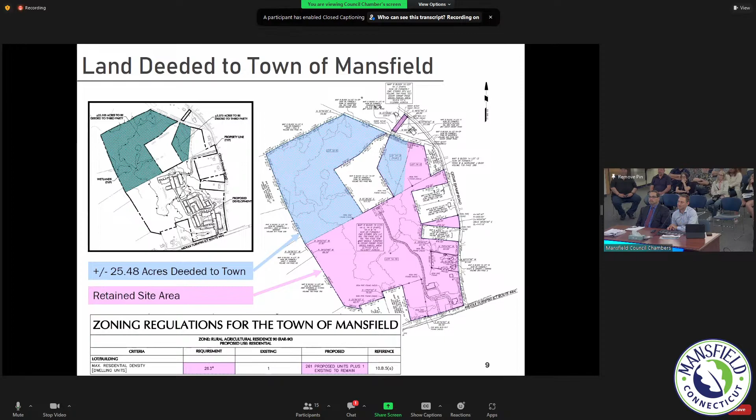This is our proposed site plan, so we can break it down into a front, middle, and back section. We have 262 dwellings, 261 proposed new apartments, and then we also have 17 Cedar Swamp Road, which is a single-family home. We were constrained by wetlands and tried to only build on the previously disturbed golf course, really important to us. So we've come to this layout, reworked many times over the years, and we have a mix. We have 3 different building types: apartment-style buildings, mansion-style buildings, and townhomes. I'll get into detail later, but the idea is that we can appeal to a wide demographic. We have a lot of different unit types, and we want to focus on whoever wants to live in Mansfield. We also have 52 affordable and workforce housing units.

In the front portion, you can also see we have resident amenity space here, with 2 patios, grills, lounge seating, and other outdoor amenities and games. In the back portion, we have another patio and green space, and we're preserving this pond and improving it, as I'll show on the landscape plan. We have green space here with a walking path, and we also have a fenced dog run.

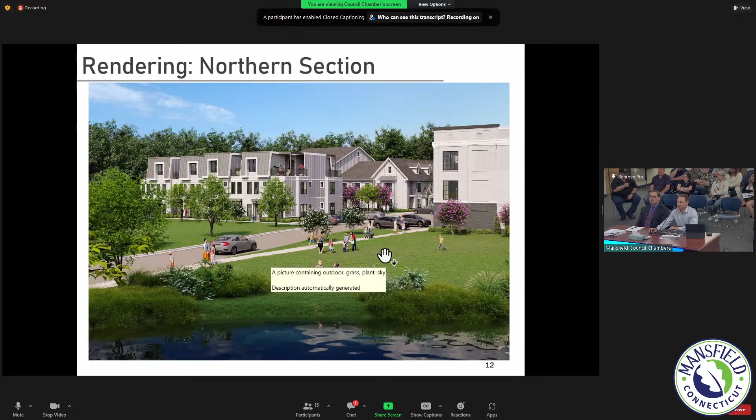This is a rendering showing the front portion, the outdoor amenity space with the 2 patios with grills and seating. It looks a lot smaller on a 2D plan, so we wanted to be able to show this in 3D.

This is a mansion-style apartment unit. Essentially, it's supposed to look like one single-family home, but it has 17 different units.

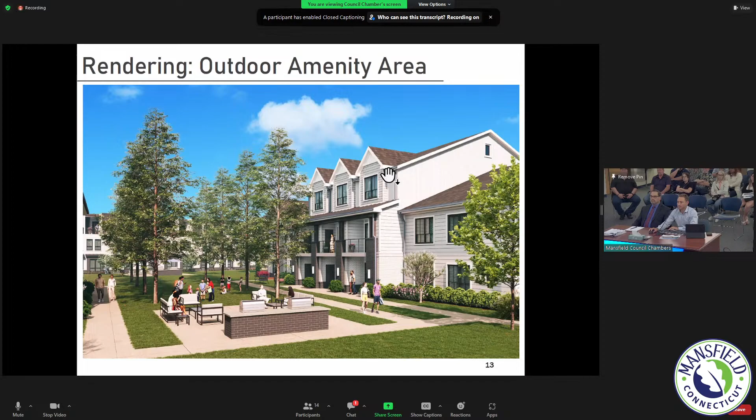Tim, are you there? Yeah, great. Thanks, Jacob. And for the record, my name is Tim O'Neill with Langan Engineering. I'm a licensed professional in the state of Connecticut. Just before we jump into the site civil discussion about stormwater and site layout, I'd like to remind everyone that this project has gone through the inland wetland approval process, and we've received approval from the committee and the third-party peer reviewer through that process.

What we're seeing here is a map of the existing watersheds on the site as it exists today. You'll see that there are 4 main watersheds, A, B, C, and D. All of these watersheds eventually make their way down to the large western wetland area at the bottom of the slope to the left of the screen here.

You'll also notice there's a subwatershed A3 that actually collects runoff from Cedar Swamp Road. It's collected into catch basins and conveyed via below-ground pipe network through our private development and discharged into an on-site wetland located in subwatershed A1.

It's also important to note that the existing site does not have any existing stormwater infrastructure, with the exception of a few pipe runs that we just discussed in watershed A1 and A2, and the existence of a man-made irrigation pond located in subwatershed C1-A. That irrigation pond was never intended for stormwater attenuation or improvement; it was strictly placed for irrigation, and it's in a bit of a decayed state.

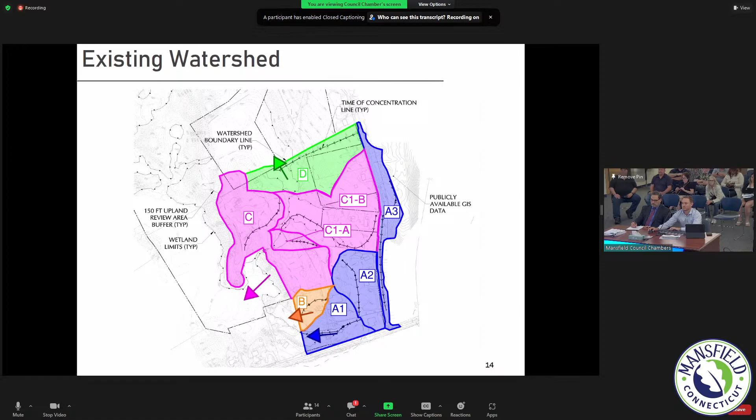Here we're seeing a zoom out again of the entire 64-acre parcel. We've highlighted the extensive wetland systems located on the property. We have roughly 22 acres of wetland on the overall 64-acre parcel. The yellow areas identify the 150-foot upland review area associated with each of the wetlands.

You'll notice that our proposed development is screened in black, in the bottom right-hand 15 acres of the site, majority proposed on previously disturbed land. You'll also notice that our concentration of development is located outside of those 150-foot buffer regions where practical, and we have very minimal direct impacts to the wetlands.

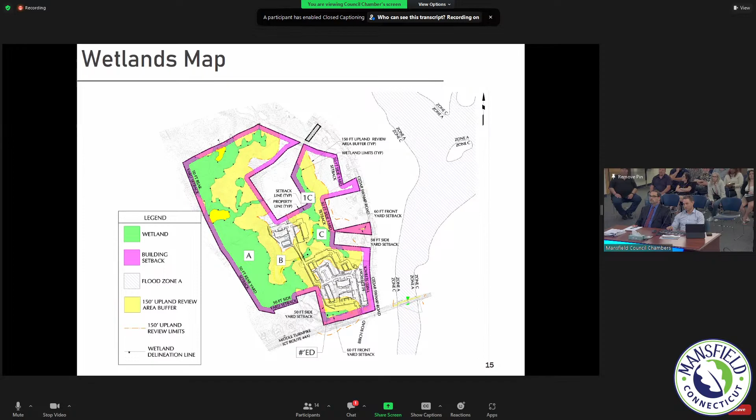In fact, our only direct impact is at the outlet of that man-made pond that we discussed on the last slide. That pond outlet control structure isn't functioning well, and it's releasing water at uncontrolled rates, and there's been known to have some issues with stable water elevations in there. Our proposed project will rebuild that outlet control structure, contribute more water to it, and help develop a healthier ecosystem and habitat surrounding that wetland in the proposed condition.

Here you can see our proposed watershed design. You can see that we are maintaining those 4 major watersheds and discharging to the same point discharge throughout the site. Again, all watersheds make their way back down to that lower western wetland region. The proposed stormwater management system provides very high levels of attenuation, infiltration for groundwater recharge, and stormwater quality.

There are 2 points on the attenuation that I would like to make quickly. The town regulation states that the 2-year rain event in the proposed condition should produce flow rates that are 50% of the existing 2-year event flow rates, or be reduced to match the 1-year existing flow rates. There's a stipulation in the regulation that allows the commission to deem this criteria impractical under certain situations, and we have identified 2 watersheds here that we believe fit that criteria.

The first would be watershed D, located at the northern region of the plan here. Watershed D is being reduced by approximately 10% in the proposed condition. The reason we aren't providing the 50% reduction is that it would require the installation of additional attenuation features or stormwater management features that would push out our limit of disturbance and further impact the well-established wooded area abutting it, or even create additional direct wetland impacts.

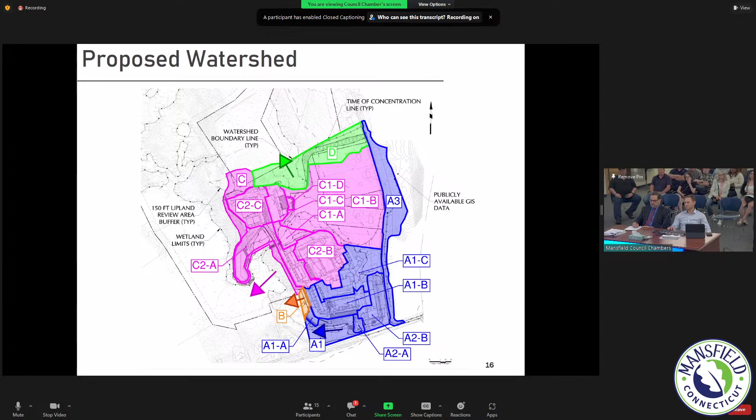However, we are still proposing to reduce the flows in watershed A by around 30%. So again, we are asking the committee to identify these as impractical for those two watersheds only, and the rest of the application meets the criteria set forth in the base regulations for the proposed design.

And then moving into the stormwater management system. This stormwater management system achieves a very high level of performance, and in many cases, we're actually exceeding the town and state requirements under many of the criteria.

We have high level of protection to the wetlands. We are, again, working in very close proximity to some of these wetlands, and we have designed our site to be condensed and as far away from these regions as we can, but we wanted to ensure that we are providing very high levels of water quality treatment, attenuation, infiltration, groundwater recharge, and water cooling effects and benefits to the environment around it. There are several features installed throughout the site, and many of the watersheds run through multiple treatment features before they actually make their way and discharge into the wetland features themselves.

We also have velocity dissipating features at the outlets of all of these discharge locations, which means that we're not creating point discharges that will scour and create sediment transport into these wetland environments to potentially harm them. So our robust stormwater management system here has really been designed to provide an extremely high level of protection to the surrounding sensitive areas before water is discharging from the site.

And it is certainly a step up from the previous condition where we had no stormwater management or attenuation or water quality features included. There's also one more point on this one.

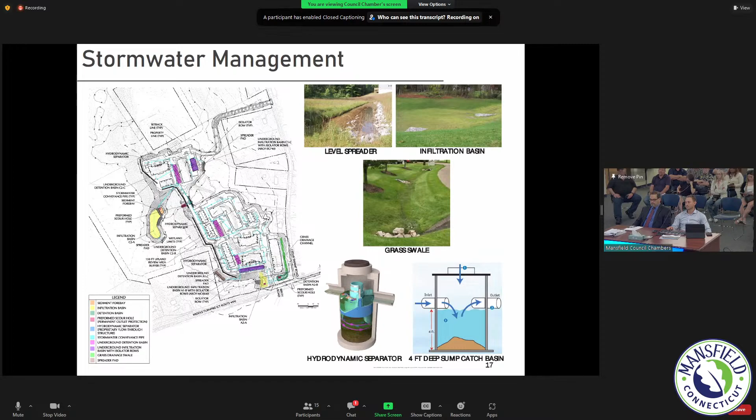There are two access points to the site. The main would be a split driveway connection down to Middle Turnpike. This is where all of the daily activity at the site will be taking place, which will keep traffic on the main road and out of the smaller local collector roads through neighborhoods such as Cedar Swamp Road.

The second would be the maintenance and emergency access gravel access road that goes up to the north and connects over to Cedar Swamp Road just off the page. This access road, again, is reserved only for maintenance and emergency vehicles. There are actually two swing locked gates at either end of the gravel driveway to ensure that no unauthorized access is being used on that roadway in that location.

You can see the vehicular and pedestrian routing throughout the site here to provide access to each of the buildings. The pedestrian connections are providing access from each building to the amenity space, the trash and maintenance enclosures, as well as a pedestrian connection down along Middle Turnpike.

There is a proposed pedestrian crossing that will connect to the multi-use trail on the south side of Middle Turnpike. We'll have more on that a little bit later, but that connection will also provide access to a public transit stop that is located several hundred feet to the south along Birch Road.

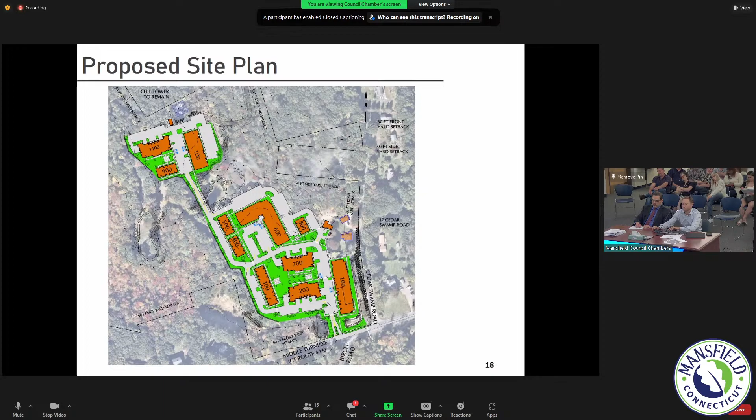Another thing you'll see here is the existing wooded scenario and setbacks from our direct abutters along Cedar Swamp Road. These wooded areas to remain will provide a significant visual buffer from each of those properties. Another aspect to this specific site is the topography — we know there's a pretty significant grade change going from east to west, which actually helps provide additional screening for our abutting neighbors.

So site section view A is a cross section cut from the west to the east through the northern section. We're showing the 53 Cedar Swamp Road residential unit right up to the public right of way. As you move down the hill, you can see several hundred feet of existing, well-established wooded area between the abutter and the proposed development, located around station 550.

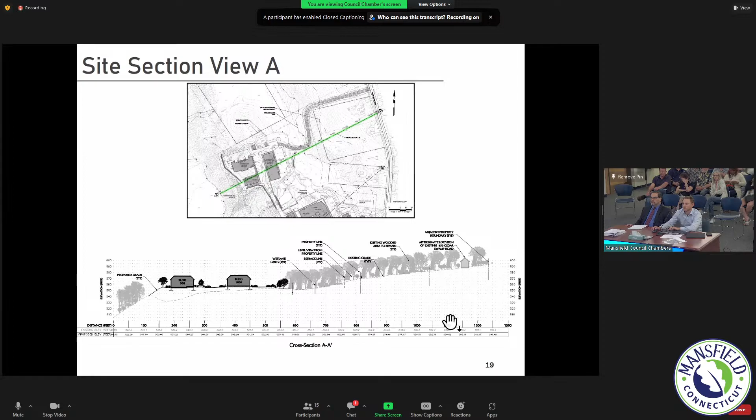In addition to the existing wooded buffer, we have proposed landscaping, which we'll get into, and the elevation difference. You can see that the residential abutter is actually above the proposed roof line of the buildings in the northern portion. So someone standing in their windows, even without any of the existing trees immediately on their property, is going to have very good screening from the proposed property below.

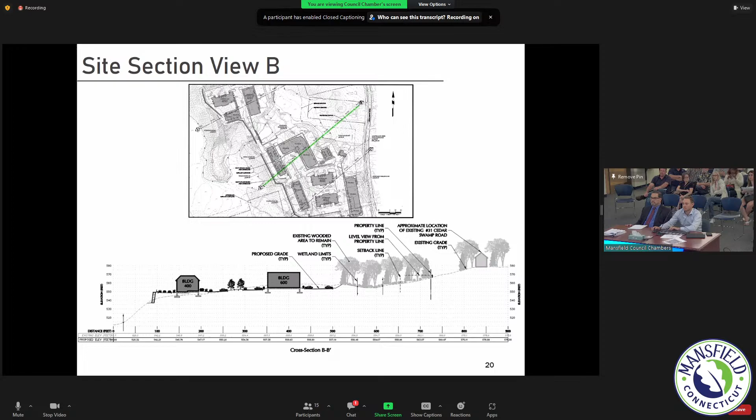Moving on to section B, which shows our cross section to our next closest abutter on Cedar Swamp Road — again we have a lot of the same similar scenarios, with existing wooded areas to remain providing visual screening, and the elevated existing residential home above the proposed property, located at a lower elevation several hundred feet to the west.

We'll move into a bit of a discussion on utilities. We have been in contact with all service providers, and we have confirmed that service will be available to the site.

For the sewer capacity, there's an existing town-owned sewer network located at the intersection of Middle Turnpike and Cedar Swamp Road that our proposed development will be tying a gravity line into.

The western two-thirds of the property discharges by gravity to an on-site private lift station. From that lift station, effluent is pumped to the east and discharged again to an on-site private gravity system where it will continue to the south and east and join into the public town system and continue on its way from there.

The water service will be provided by CT Water. This will require a roughly 750 linear foot water main extension for a 12-inch water main that's located just to the east of the property past the Cedar Swamp Brook and Middle Turnpike crossing. We have confirmed with the CT Water company that they do have capacity, and they have deemed that the extension to the property for service is appropriate for this application.

We have also been in contact with Connecticut Natural Gas to provide gas to the site. This is currently an ongoing conversation, but preliminary designs are in the works to extend service to the site and provide distribution on the private property itself.

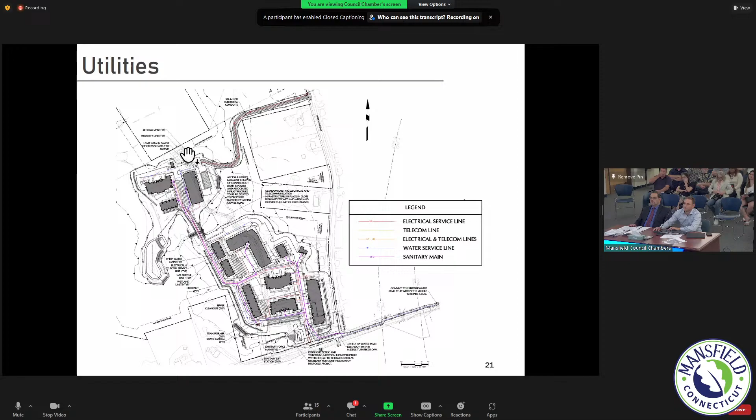If you could swap to the next page. With the cell phone tower to remain, we will need to relocate the current below-grade infrastructure and the easements granted to utility companies. We'll be demolishing and relocating the easement and below-grade infrastructure from the highlighted existing yellow easements that go down and tie into the network along Middle Turnpike to the magenta area.

The infrastructure will all be completely below ground and below the 20-foot wide maintenance and emergency access easement up to Cedar Swamp Road, where we will tie into the utilities along that right of way there.

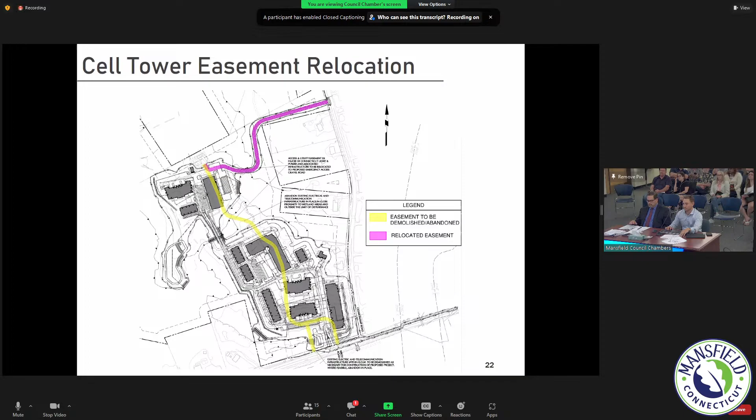Before we move into the next section—yep, next slide here. I'd just like to reiterate that the soil erosion and sediment control plans were reviewed under the inland wetland application and peer review process that we currently have approvals for.

We chose to go with a 3-phased soil erosion and sediment control plan, understanding that we have a lot of sensitive wetlands on site. We wanted to be positive that we were providing a robust and comprehensive soil erosion and sediment control plan throughout construction to ensure that these sensitive areas are not impacted.

In phase one, the contractor will come in and install all of the perimeter controls, and you can see that there are more robust controls in close proximity to wetland areas. These would consist of compost filter tube berms and silt fences rather than just your standard silt fence, shown in blue. We have a few discrete areas where we are also adding in hay bales for a more structural barrier where steep slopes exist.

We have sediment traps and basins to divert runoff to for settlement time before eventually discharging to the wetlands themselves. In phase one, you could expect work such as clearing, grubbing, and construction staging, but before any work is performed, these perimeter controls and sediment erosion control features will be installed.

You'll also see that there's a phase 1A insert, and that is because the underground infrastructure for the cell phone tower needs to be installed immediately so that we can get the disconnect and reconnection with low service interruptions and to progress the design of that early on in construction.

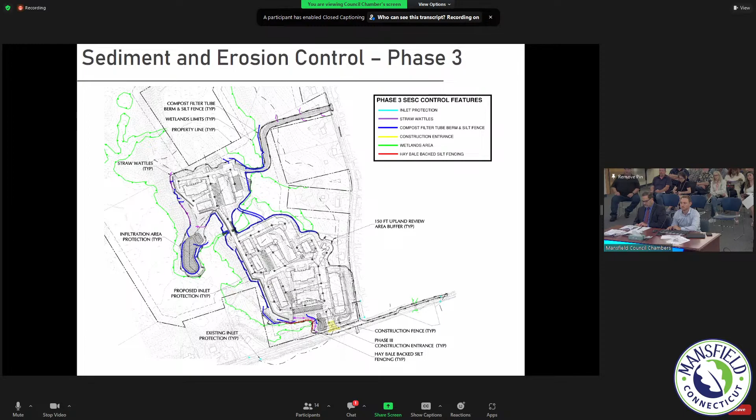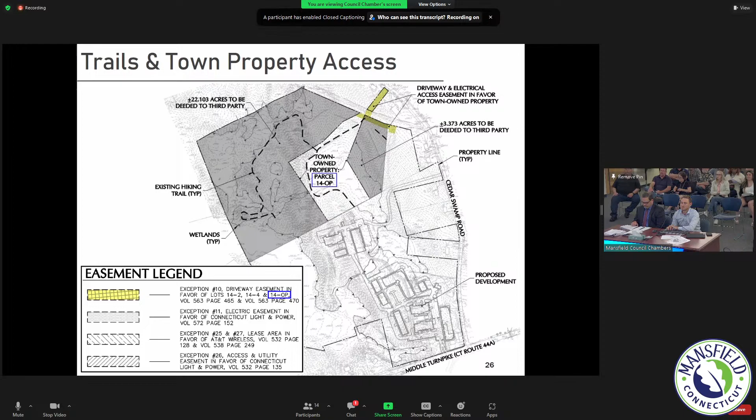Before I turn it over, I'd like to give a quick comparison to where our original application to the inland wetlands back in 2021 started, and where we've ended up with the application before you today.

Our most notable features are the significantly increased buffer areas between sensitive areas such as wetlands and our neighboring property lines. You'll also see a significant reduction in proposed retaining wall height throughout the entire western face of the proposed development, the most significant one being a reduction from approximately a 40-foot retaining wall down to a 20-foot retaining wall, to work with the topography of the existing site and respond to comments we've received from the town.

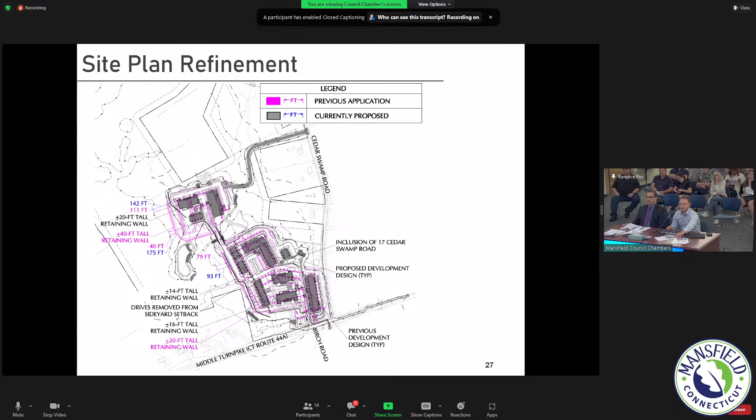And with that, I'll turn it back over to Jacob. All right, funner stuff.

The goal here is to create a community. You may ask why we have three separate building types. One, it's from feedback over the last five years on what the town would like to see, which is more middle density housing. Second, by using cohesive elements, designs, pictures, and windows, we were able to create a community within a community.

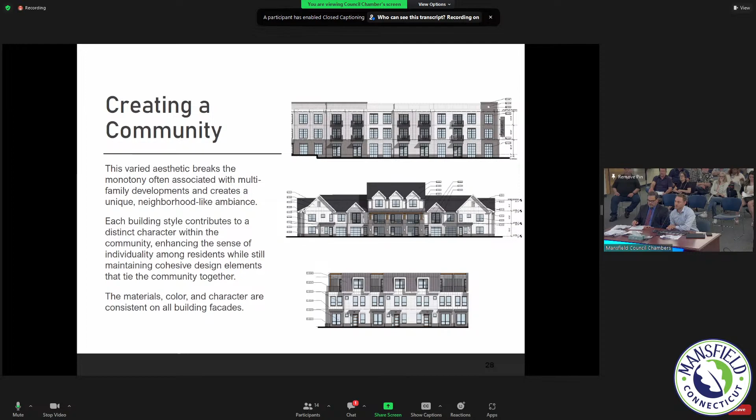A lot of multifamily buildings, like the one across the street, all look exactly the same, with no distinctive character. Here we want to provide three different types of building types, which will enhance the feeling of a community.

As I mentioned, we have three separate building styles. We have apartment style buildings, shown on top. These are 3-story buildings with elevators and double loaded corridors, maybe fitting someone who wants a more social aspect and neighbors in close proximity. It also allows us to have a more efficient building, reducing our building footprint and impervious surface area.

Next we have 3-story, 3-bedroom townhomes. You can see they all have separate entrances and a nice private roof deck. Maybe this is ideal for a family, someone who wants privacy or more space.

Next we have mansion style. I believe we're the only builders in town proposing this style. They're 2.5 stories, and the intention is for this building to look like a single family home. However, there are 17 units in each building, with a mix of units including lofts, offices, and units with direct garage access and private garages. We're really excited to bring this to life.

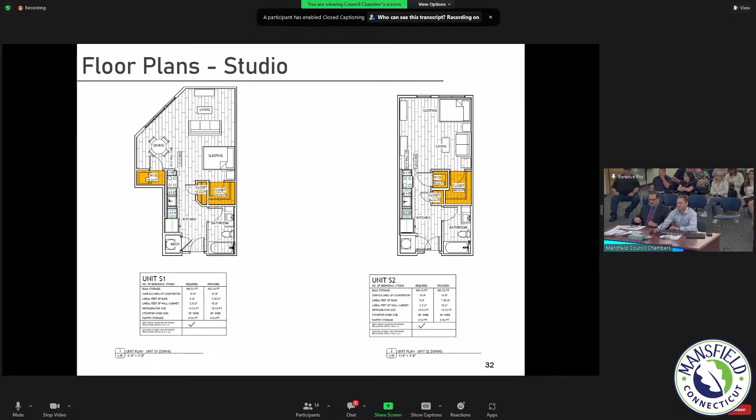On the screen now is some of our studio units, which are in the 3 traditional apartment buildings. These units vary from just under 500 to about 580 square feet. All the homes meet the design guidelines and the zoning requirements for kitchen design, storage, ventilation, sunlight, and so forth.

The color coding on these works like this: the orange areas are areas we're identifying as storage, the dark blue is outdoor space, and there's good outdoor space for the majority of the units, not all, but most. Light blue is where we calculate the countertop areas, and the green areas are the kitchen pantries. Again, this all relates to the Chapter 10 zoning requirements for different multifamily design minimum standards.

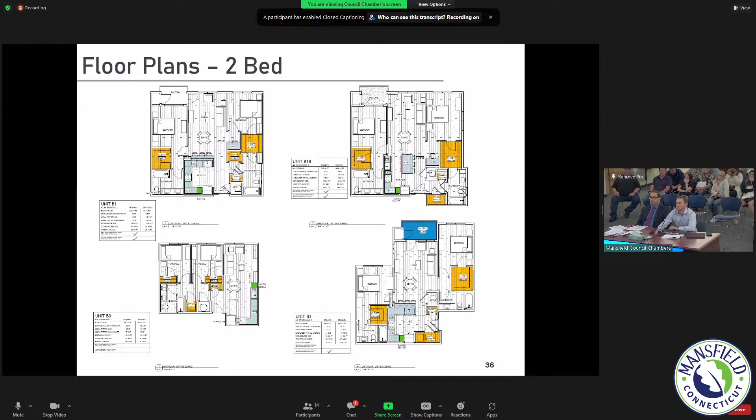Here's some examples of the 2-bedroom units in the traditional apartment buildings. There's a great variety within the apartment buildings, ranging from a very efficient, in the lower left-hand corner, 730 square foot 2-bedroom 1-bath, up to almost 1,200 square feet in the upper right-hand corner, the unit B1B. You'll see large living rooms, areas for dining, kitchen islands in many of the units, lots of storage.

There are a handful, not too many, I think the total count is 11, 3-bedroom apartments in the traditional apartment buildings. These homes are actually very large at approximately 1,450 square feet. These are 3-bedroom, 3-bath apartments, and the idea here, again, is they only occur on outside corners. We can get glass on 2 sides, lots of openings into the living, dining, kitchen area. So these apartments should live very large.

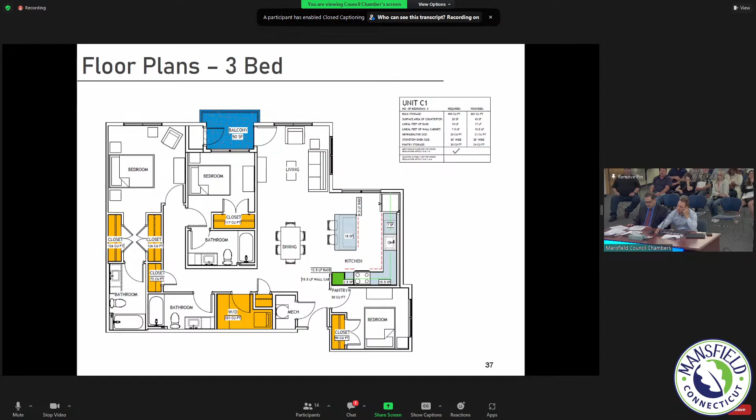And then finally, Jacob mentioned the townhouse buildings. All of the townhouse buildings are back-to-back townhouses, 3 stories in height. They're all 3 bedrooms and 3.5 baths. The first level of each has all the living spaces: living room, dining, kitchen, and a powder room. On the second level, there are 2 roughly equal bedrooms with walk-in closets and their own private baths. On the top floor is the primary bedroom, as well as a large rooftop terrace, that area in blue on the far right. At almost 1,700 square feet, this is the largest home, the largest type of apartment within this overall project.

So hopefully, as you can see, there's quite a variety of building types and home types, which we hope will appeal to lots of different folks and help create a real community. As you saw in some of the renderings earlier, we'll use these building and unit type differences to create different building forms, which will provide us with great visual interest in the site. But what really pulls it all together is the landscape design, which Kate will review for you now.

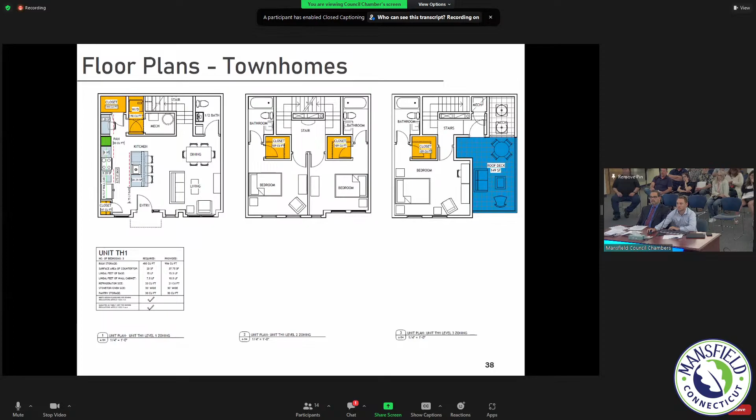Good evening. For the record, Kate Throckmorton, a licensed landscape architect and partner with Environmental Land Solutions, with offices in Norwalk, Connecticut.

Right now it is occurring as just grass or golf turf, so that will be diminished. We're creating outdoor spaces for the residents, naturalizing the landscape around the pond, and establishing a walking path throughout the site from Middle Turnpike all the way up to the open space at the north end. With that, we could go to the next slide.

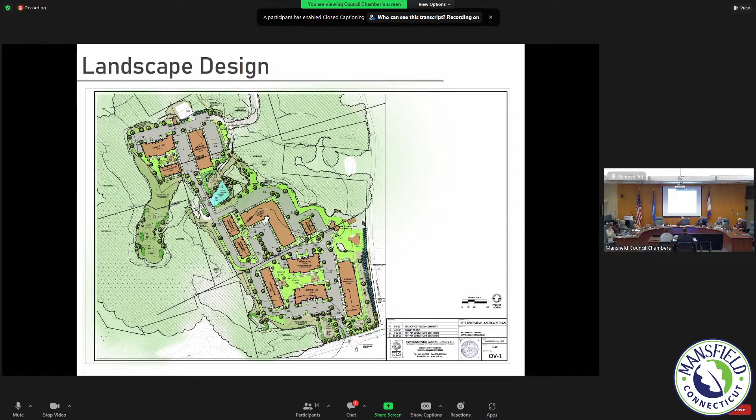In addition, as it has been noted, there's a substantial portion that's going to remain in open space, and we're connecting all these paths to make sure that people have places to walk, not only immediately around the townhouses, but to connect to natural areas and beyond that extend to Cedar Swamp Road and to bike paths to the south.

So with that, we can go to the lighting plan. The lighting plan was prepared to provide adequate lighting throughout the site for safety and comfort for pedestrians while maintaining uniformity of active lit areas. This is achieved by using 3 types of light. One is the Bega wall luminaires, which are used along the building entries and walls and sidewalks.

That's in a downlight, the Kim Attitude post lights throughout the site. That's going to be a 14-foot tall post light. And then in addition, Hubbell wall packs at the end of buildings to provide uniformity throughout the pedestrian areas.

All the light fixtures are going to be LED luminaires with a warm color spectrum of 2700 to 3000 K. All of the lights are going to be a maximum height of 14 feet, which are all pedestrian friendly and pedestrian in scale.

Together, these lights will provide an average of 1.27 foot candle for the entire site, and around the paved and walked areas it will be 1.9 foot candles throughout the site, with a minimum of half a foot candle for all bike storage areas. We did have one outstanding area that was highlighted in the last set of peer reviews, where we found one area below those levels, and we have added a double light fixture to that pole to provide the minimum requirements and adequately light that whole area.

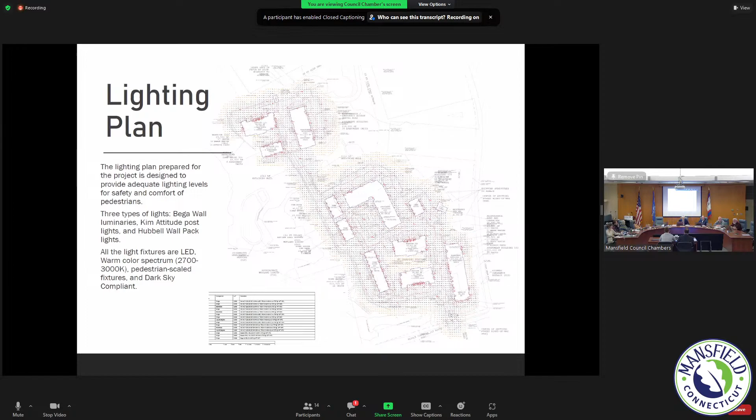Thanks, Kate. I believe Max is going to take traffic.

Yes, I'm here. Good afternoon, members of the board. My name is Maximo Polanco from Langan Engineering, address 555 Long Wharf Drive in New Haven, Connecticut. I'm a licensed professional engineer in the state of Connecticut, and I've been the traffic engineer working on the project since the beginning.

So for this project, we prepared a traffic impact study following Connecticut DOT standards, and we've demonstrated that the existing roadway network has the capacity to accommodate the anticipated traffic from the proposed development. In the next couple of slides, I will go through the proposed development and the process we went through in doing the traffic study.

As previously mentioned, the traffic study was done in accordance with CTDOT standards, where we evaluated the existing and future traffic conditions in the area with and without the proposed development, and analyzed the impacts of the development. Based on our analysis, we demonstrated that the existing roadway network can accommodate the project.

In addition, as previously mentioned by our team members, the project's proposed connection is to Middle Turnpike, which is within the jurisdiction of CTDOT, and will have to be reviewed by the Connecticut Department of Transportation, which has been submitted to them for review.

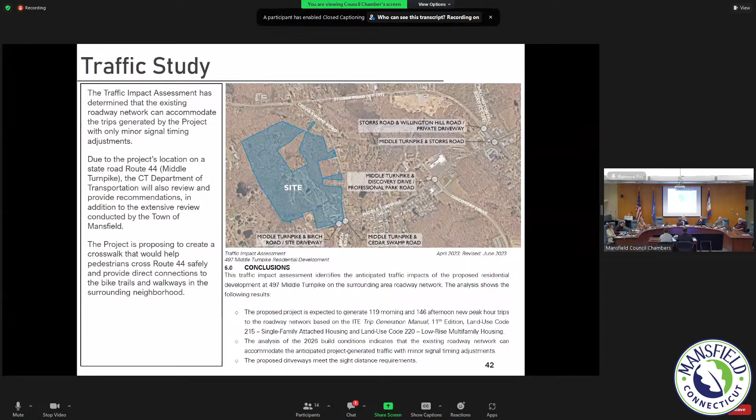So before we touch base on the results of the traffic study, we just want to briefly cover the property's access. Jacob, if you can go to the next slide. As previously mentioned, we are proposing 2 accesses for the site.

One access will be an emergency access only on Cedar Swamp Road, which will be gated to avoid any cut-through traffic and avoid heavy impacts to such a small, low volume road. This focuses all of our traffic to Middle Turnpike, which will provide a full access driveway, shown here on this small snip on the low side of the screen, basically across Birch Road.

Also shown here on the screen is the proposed crosswalk to the shared use path, which will be controlled with what we call rapid flashing beacons and proper signage to provide a safe crossing for pedestrians.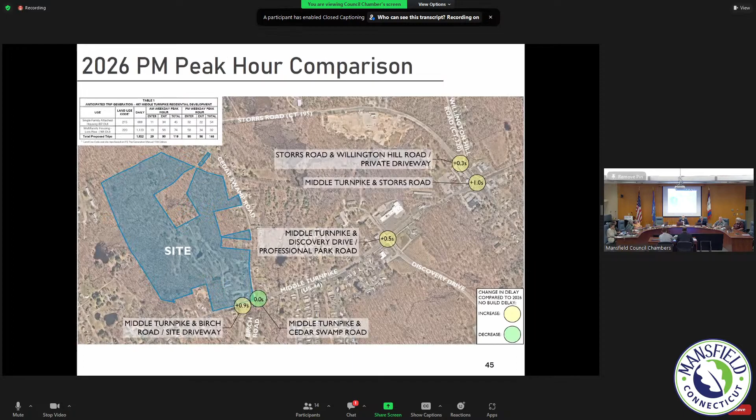So that's the design description. I wanted to close out with a little bit of discussion on compliance with your regulations and with state law. First, as we've explained, my client is proposing to build 52 affordable and workforce apartments as part of this development, not seeking a fee in lieu or any other kinds of alternate compliance. They will be built and occupied.

You have from us detailed descriptions of how those units will be marketed, how tenants will be qualified for them, how the units will be administered, how the rents are calculated. All of that is in the affordable workforce housing plan that's attached to our statement of use. I'll have this as Exhibit C, and other related documents in there.

A short synopsis is, as I said, 52 affordable and workforce units, 39 of them are affordable, which means they are affordable to people who make 80% of the area median income. That's 15% of the units. And then by your regulations, there will be 13 workforce units, which are defined as apartments affordable to people at 120% of the area median income.

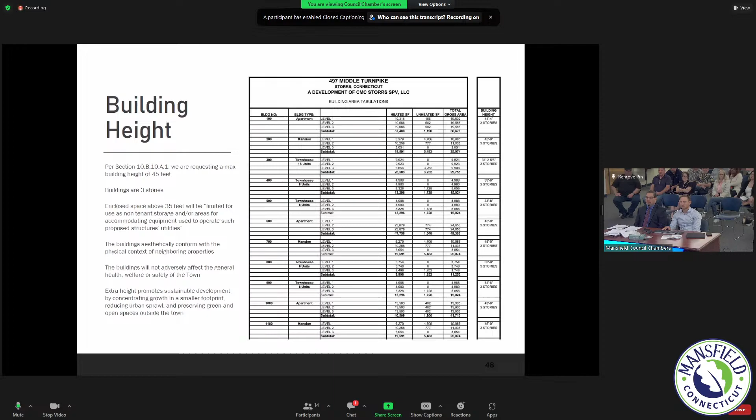So, in your multifamily regulations, you have 3 approval considerations. Those are the 3 topic areas: overall project design, adaptability, and multi-generational housing. This is subsection 16 near the end of the multifamily regulation. And what you say for overall project design is that the development complies with all the development standards identified in this section and with the intent of the design guide. So we've talked about that, and I believe we have shown you in our submission as a whole how we comply with that standard. Second, that this is just for multifamily dwellings, that they will be easily adapted to accommodate a different target market.

And I'll pair that with the last standard of multi-generational housing. It states that the commission must make one of two findings. The second possible finding, having to do with special needs housing, I don't think would apply here. So the first one is that the plan sufficiently addresses the design standards and guidelines in the multifamily regulation.

And will result in housing options that meet the needs of all residents, including singles, families, seniors, and students. I would submit to you, I hope that came through loud and clear in our presentation and in our plans that we have submitted, that this is really one of the central animating goals of this proposal and the overall design. It is specifically intended to make it adaptable, attractive, and useful to a variety of populations, different tenant markets, and a variety of demographics and generations.